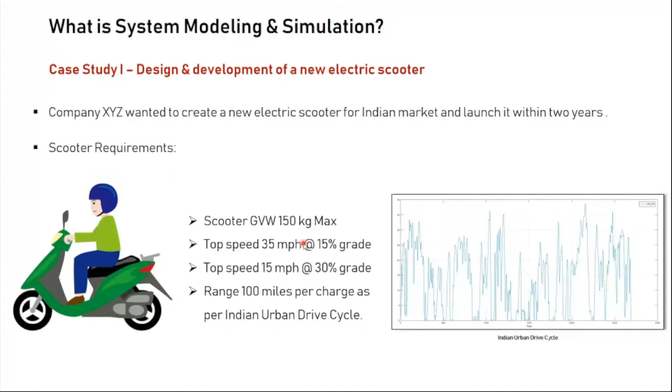You can go with 42 volts, 92 volts, or even higher voltage, but what is the voltage which you should go with? What should be the capacity of the battery? What should be the power? And what should be the configuration? In terms of lithium ion cells, you can have different numbers of cells in series and parallel. But what is the specific configuration, or how many cells you should keep in parallel, how many cells you should keep in series? That is the big question when you try to design an electric vehicle.

In the same way, the next question is: what motor should you be using? When you talk about motors used in electric vehicles, you have BLDC motors, permanent magnet motors, induction motors, switched reluctance motors — which one should you use? And what should be the motor power, efficiency, max current, max voltage? The next question: what should be the gearbox efficiency, and what should be the gear ratio? The gear ratio can vary from anything like 10 to 17 to 20, but which one should you go with? Different tire sizes are also available in the market.

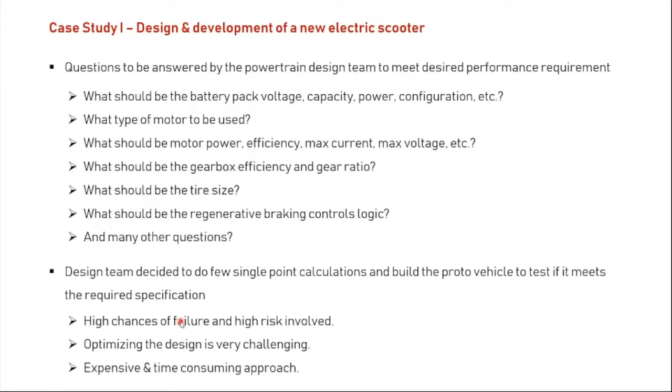So if they go with this idea, then definitely they are not going to meet the deadline of 2 years, because they have to have a product ready before 2 years. So they started thinking, what else can we do to get some confidence on the design before building it?

So realizing the risk involved in the conventional design approach, the team started thinking: is there a way to get confidence on proposed powertrain design concept without building it or without building the physical prototype? Or is there a way to test multiple powertrain design concepts without building the physical prototype? Or is there a way to reduce the number of real tests?

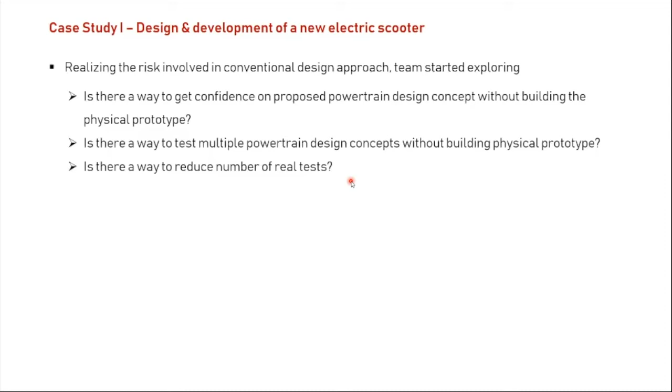So the team doesn't want to go with the conventional approach, but they wanted to get confidence on the design concept before building the prototype, and have a clear thought of what they are going to build and how it is going to perform. So how to do that? And the answer they got is system modeling and simulation.

So the team decided to build a virtual model of the electric powertrain and perform a simulation to predict its range. So now they decided they are not going to build the real physical electric vehicle, but they want to virtually model all its components one by one.

So they build the mathematical model of the powertrain components, that includes the motor, battery pack, and the gears, the tires, complete vehicle, and they integrated it to build the powertrain system model.

They did simulation runs with multiple concepts, because now you don't have to get a new motor. You just need to create a mathematical model or alter a few things in the model, and it will become a new motor. So likewise, you can test multiple concepts if you build the model of the powertrain.

Then, based upon the output, they decided which is the suitable powertrain component, and they built the physical prototype of that particular concept model, and then they ran the test and validated the results with the simulation. So here, whatever approach the team has taken, going with the virtual simulation, is the thing which the industry practices these days.

Nobody is going to build right away, start building with some single point calculation. They will first make a virtual prototype in the computer, test it, and then go for physical build.

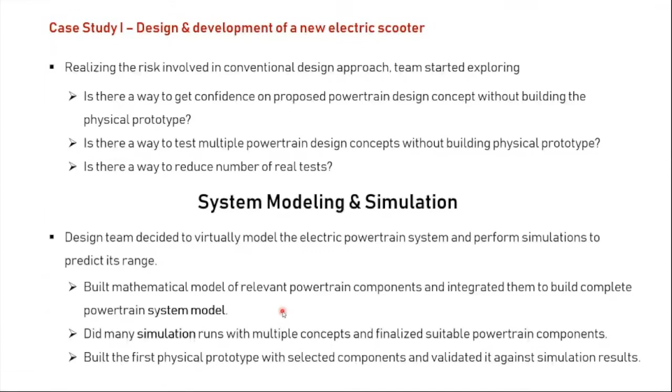So this is a small use case, but I want to show you some real examples. After this, once the use case is completed, I will read you the definition.

The definition of system modeling and simulation is the use of interdisciplinary functional, architectural, and behavioral models with physical, mathematical, and logical representation, performing model-based system engineering to specify, conceptualize, design, analyze, verify, and validate an organized set of components, subsystems, systems, and processes.

So now you know why I'm not a big fan of the definition. But here's the takeaway: you create an interdisciplinary functional model based upon the physics and mathematical behavior of that particular component.

Why I said interdisciplinary - when you talk about a vehicle, you have batteries, which is an electrochemical component. Electrochemistry goes into it, then electrical and electronics goes into it. When you talk about the motor, it's an electromechanical component. So it's not a single domain engineering product. You need knowledge of multidisciplinary engineering subjects to work on this. That's why it's called interdisciplinary function.

And the models are based upon physical and mathematical behavior of the system. It is not used only in one phase, but to specify, conceptualize, design, analyze, verify, and validate - in all stages of the project, it's used.

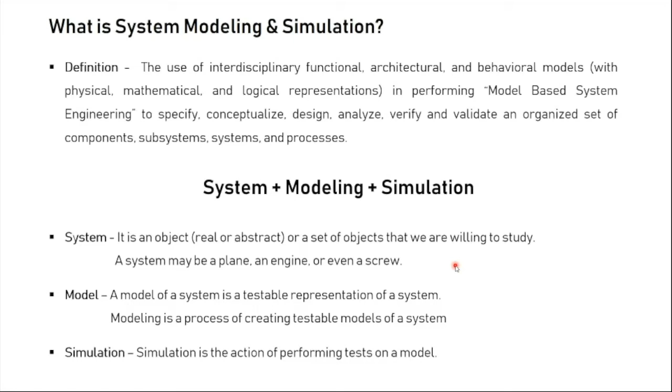So I hope you've got some idea about what system modeling and simulation is, and how it can be used in a project or while designing any product. Now, some real applications of system modeling and simulation from industry.

There are lots of examples - many examples - but in the interest of time, I have kept only two. The first is this Motobot, an autonomous robot capable of riding super bikes and competing on the racetrack.

If you're a MotoGP fan, you might know that Yamaha was working on this Motobot, an autonomous robot that can drive super bikes and compete on the racetrack. This was not done before - Yamaha engineers were the ones doing it for the first time.

So they wanted to check whether it is feasible or not. They hadn't started designing this in the initial stage of the project. What they did is create a mathematical model of the robot, did system simulation to see whether a robot is really capable of driving a vehicle or not. That is how they first validated their concept in a virtual environment and fine-tuned the system.

And when they got enough confidence that yes, this is possible, they started designing the real body of the robot, the real hardware, and started working on it. This is the way industry approaches creating a new product, or even optimizing one - if system simulation wasn't done before, they are doing it now.

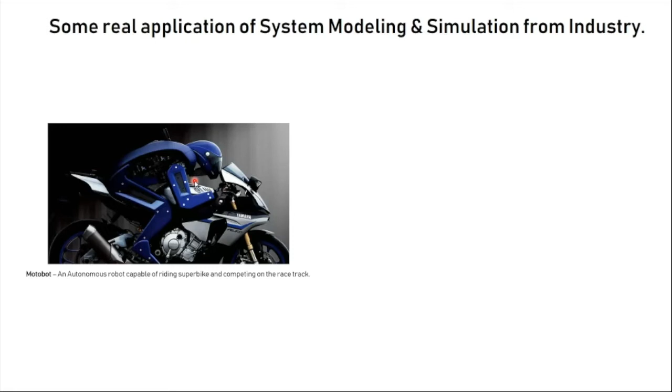The second example is also from the automotive industry, and I hope everyone knows what it is - the Ather 450X. Engineers of the Ather 450X highly used modeling and simulation tools, basically MATLAB and Simulink, to model the vehicle, to optimize the motor, the regenerative control logics, and the batteries. They extensively used modeling and simulation to come up with a product like this. These are two examples, but there are countless examples if you look outside.

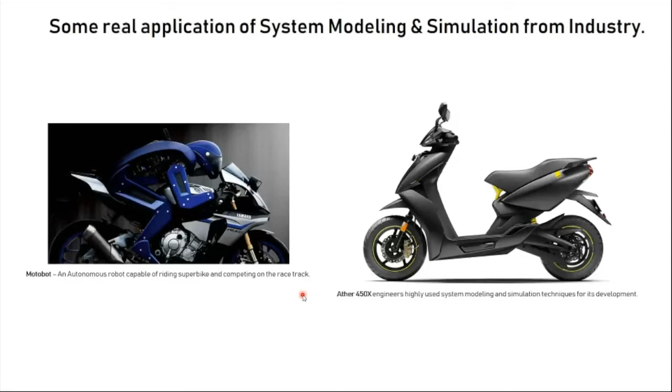So after that, let's move into some of the history of system modeling and simulation. System modeling and simulation didn't exist before 1940, and the reason for that is you need some kind of tool or aid to do that much computation, that much simulation.

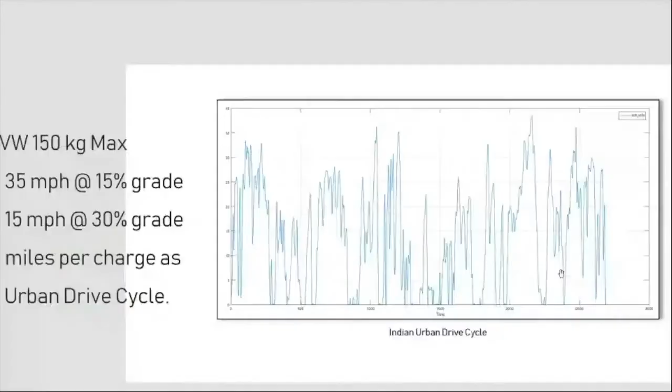So what happens when I spoke about this drive cycle, I'll quickly show you. When I showed you this drive cycle, you need to perform computation based upon your time step. Let's say your time step is 1 second. So total around 2,700 times you need to compute the vehicle velocity, how much current is drawn from the batteries, and what is the voltage drop. You need to compute it about 2,600 or 2,700 times.

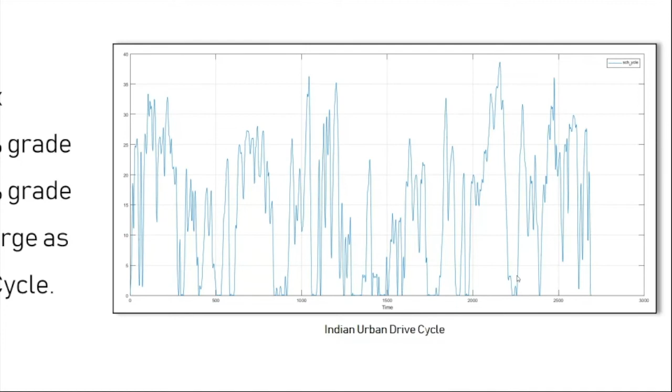And it is really challenging for any human to do that. You can do it, but it's very time consuming without the help of any computer. That's why system simulation was not very popular before the 1940s.

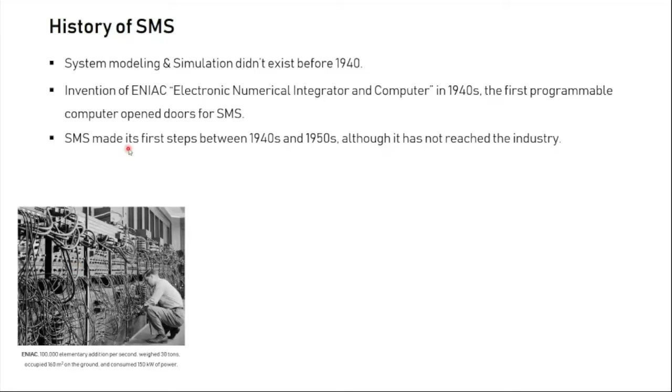But what happened is after 1940, we got our first Electronic Numerical Integrator and Computer, called ENIAC. That is the first programmable computer which came into existence in the 1940s, and that's what opened the doors for system modeling and simulation. SMS made its first steps between the 1940s and 1950s, although between the 1940s and 1950s, people started working on it, though it hadn't reached the industry.

Now, when you talk about SMS, there is still a huge gap within the industry, as well as between industry and academia, where most people in academics, in graduate and undergraduate programs, don't know about system modeling and simulation. Though in PhDs, most PhD students use this, undergraduate and graduate students don't have much exposure to it. This is the condition in India, but in foreign universities, there are some courses which offer this to graduate students, and that's how they get to know about it.

And when we talk in terms of industry, this is something like a secret weapon which the industry wants to keep within themselves, so that others won't know about it, and they can make products faster and quicker compared to their competitors. So there is a communication gap, and that is the reason most people don't know about it. I tried to learn it on my own.

And the most challenging part was to have a structured approach toward learning it. If you want to develop capability in any area, let's say mechanical engineering, there's a very structured way of defining it, where you need to start, what you need to know first, and then you can start learning about it. But when it comes to system modeling and simulation, there is no structured approach because of this huge communication gap between industry and academia.

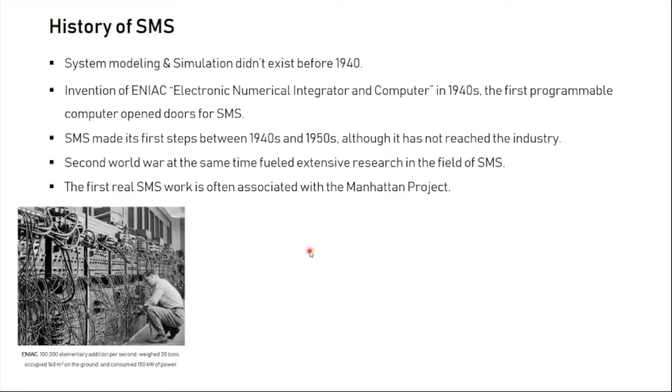And the first real system modeling and simulation work was used in the Manhattan Project. Most of you might know what the Manhattan Project is, and if you don't, it was about the development of the first atomic bomb, which was dropped on Hiroshima and Nagasaki by the US. That is what the secret project name was, the Manhattan Project.

And this is the person, John von Neumann, who was one of the pioneers in SMS in the 20th century. He and his co-workers worked on the first computer and modeled and simulated the nuclear detonation process, which ultimately led to the invention of the atomic bomb. He was a great scientist and mathematician of his time, and this was not his only contribution — there were many simulations he did without which the atomic bomb could not have been created.

And the algorithm which he has used is the Monte Carlo method for simulating the nuclear detonation process. So this is the history of it, and it is always good to know about the history of the things you're learning. So a bit of that.

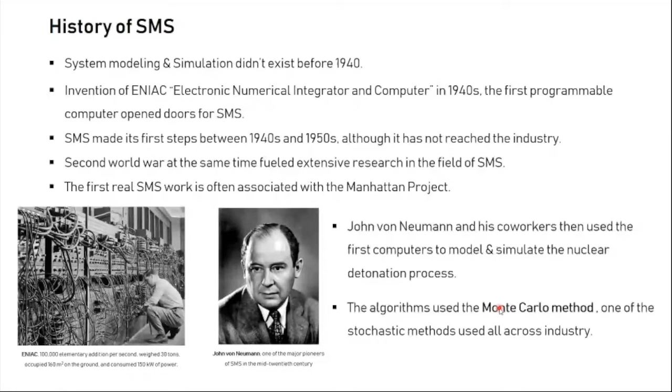Next, let's talk about some of the benefits of system modeling and simulation. The benefits can be categorized into two groups: the direct benefits, which are intrinsic benefits, and the financial benefit or the indirect benefit.

So what are the direct benefits? Testing cheaper and with more possibilities. Essentially, you are creating a mathematical model of a system, so you can create n number of variations of that system by changing the parameters. You don't really have to bother about the actual hardware, so you can test more possibilities. Since changing a parameter of a system is not a big deal, you are not ordering hardware or buying it, you're just changing the system parameter in the computer. The testing is much cheaper, and that is one of the biggest benefits.

Another benefit is accumulate and improve knowledge. When you model a system, you can learn so much about it by simulating its behavior. For example, let's say you model a battery thermal management system. You cannot monitor temperature at each and every point, you cannot put sensors everywhere, but in a computer virtual environment, you can put sensors everywhere and collect so much data which you cannot obtain from the real physical test system.

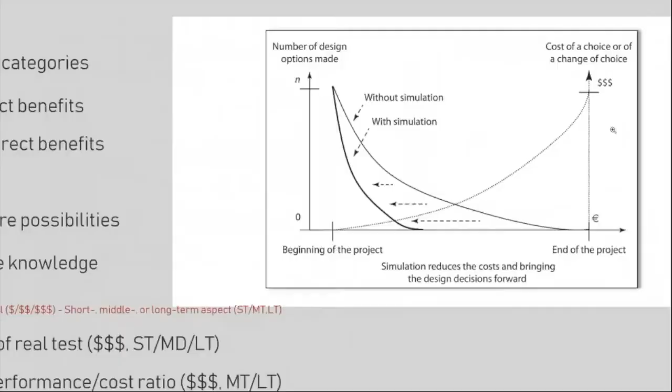And the fourth benefit is it decreases the cost of the design team. Yes, because we'll see how it helps in decreasing the cost of the design team. When you look at this graph, at the beginning of any project you have so many options to do - many decisions need to be made, like this motor, this battery, that battery.

Now, if you have simulation capability with you, you can run a simulation, and at the very beginning of the project you can decide which motor or which battery you want to go with, whatever you're working on. So you can make decisions very quickly and come up with a finalized design very quickly. But if you don't have simulation capability, you still have so many decisions to be made - you're not sure which battery, which motor, or whatever hardware - and your time doesn't stop, but still you need to make so many decisions.

And that's how the project goes, where till the end so many things are open. On the y-axis on the right side, during the phase of the project, from beginning to end, if decisions are made late in the project, it is going to cost you so much. So the later you make any decision in a project, the more cost it is going to incur.

That's why when we do any project, we try to have a crystallized understanding of what we are going to do, what components, what product we are going to use. With simulation, it is going to help you reduce your cost. But without simulation, chances are your cost will be high.

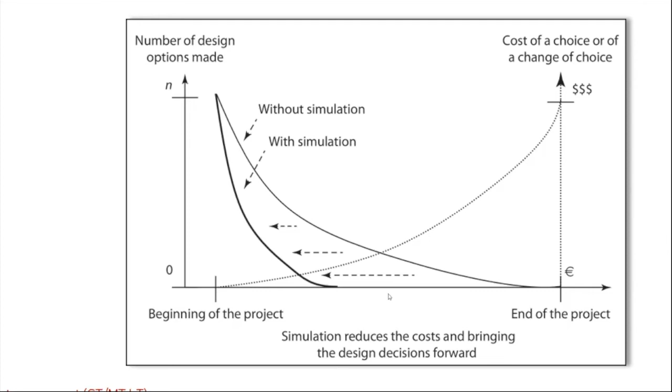Some of the audience who attended Dr. Ali Abbas's presentation on day one, I remember he mentioned testing a single hydro turbine costs like 50 lakhs rupees, if I'm not correct. So 50 lakhs rupees for a single turbine is too much, and that too you don't know whether it is going to work or not. That is why they resort to system modeling and simulation of the turbine using different blade profiles in the CFD analysis. That is one example I can quote, and likewise there are so many examples where you can save a good amount of money if you do system modeling and simulation.

Another benefit is making components more robust. Another point is decreasing time to market - you can decrease time to market because now you know what you need. You can engage the supplier at the earliest, request for the new part as soon as possible and get the items done, test it earlier, validate it earlier, and launch it quite earlier than anyone else. So these were the benefits.

And now we'll talk about types of system modeling. When we talk about system modeling, there are different types of systems available, but we will be discussing only two: the physics-based model and the data-based model.

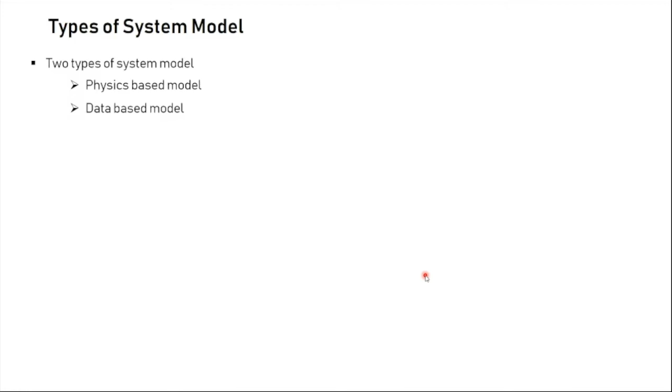So what is a physics-based model? It is a multi-physics model based upon several laws and theories of physics. It's multi-physics because if you see any component or product, let's say a motor, you cannot apply a single physics law or theory into it because it involves electricity, magnetism, and mechanical laws. So there are so many things which go into it, that's why we call it multi-physics. If you see most dynamic systems, it's never a single law of physics that can work - it has to be from multiple domains of physics.

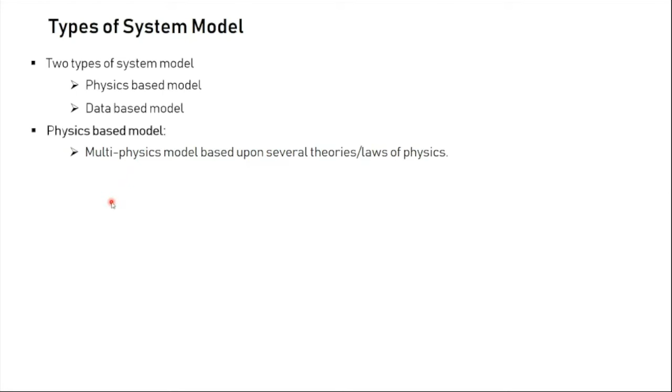And that's what the physics-based model looks like, where you use the laws and theories of physics to create it. And what is a data-based model? Data-based models are models created based upon the data captured from the system using different tests.

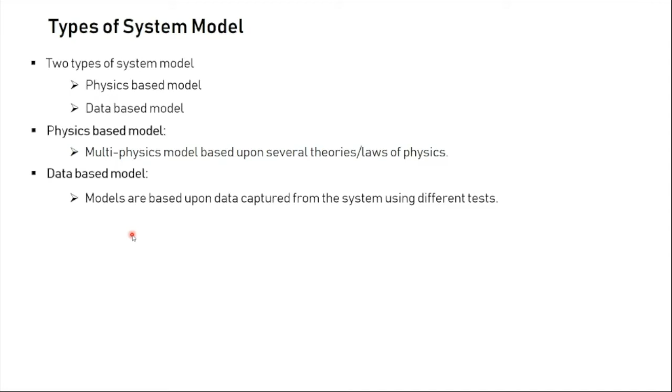So don't worry if you're not able to understand it, I'm going to explain it with the help of an example. If you want to create a data-based model of any system, you subject that system to multiple numbers of tests. You gather the test information, and based on that test, you can create a model of that particular system. Let's try to understand with the help of an example.

Let's say you want to create a permanent magnet synchronous motor model for powertrain performance simulation. So what are the inputs required for a physics-based model? You would need the d-axis current, q-axis current, stator phase resistance, d-axis inductance, q-axis inductance, permanent magnet flux linkage, shaft moment of inertia, Coulomb torque, viscous friction coefficient. These are the internal parameters of the particular PMSM motor. In order to create a physics-based model, you need to have all these input values for the system.

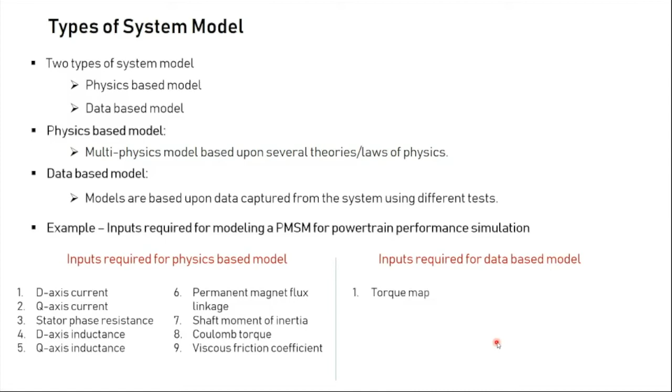You can see here, you have the electricity, you have the resistance, you have the magnetic field, you have the moment of inertia, Coulomb torque. And if you want to create a data-based model, then you need to test this permanent magnet synchronous motor to get a torque map and the efficiency map. Torque map is nothing but a graph or plot between the torque you are getting at different RPM, and the efficiency map is a map of torque versus RPM and what efficiency you are getting at a particular torque and RPM.

So with these two inputs, you can create a data-based model of a permanent magnet synchronous motor.

Now, if you're working on a project where you need to model a motor, usually you will go with a data-based model. The reason is if you're not designing a motor and buying it from outside, the manufacturer is not going to provide you all these internal details because these are related to the design of the motor. They cannot share that because it's kind of an internal secret they want to keep to themselves, and they don't want to reveal it because if they do, the competitors may also know and create a similar product. So they don't want to reveal it, and you cannot easily find these values, or else you have to tear down the motor and check everything to get the values. So if you're not manufacturing or designing a motor, and you're just using a motor from a supplier, then you will go with the data-based model approach.

And this is what most industries follow, electric vehicle industries follow, because they don't develop motors, they order motors. Sometimes you work closely with the supplier, and that time you can get access to this information, but most of the time it's the data-based model which we'll be working on.

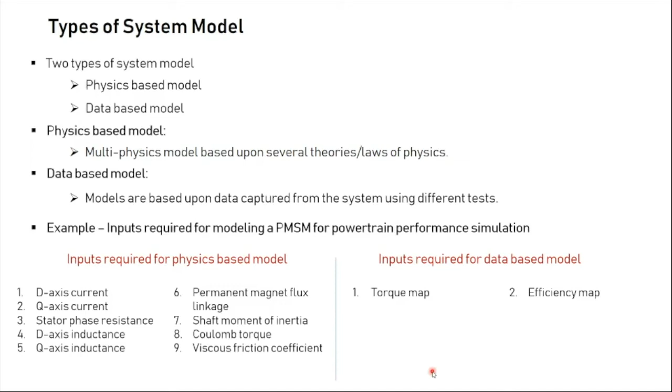So that's how you have to choose which type of system model you have to create, based upon the type of work which you are doing. So let's see what are the generic steps involved in system modeling and simulation.

So when you start creating a model of a system, the first step is to derive the governing mathematical equation. I will tell you the steps and then we will see one example, and hopefully after that example, you will understand how a system model is created for any particular system. So first you need to derive the governing mathematical equation, maybe using Newton's laws or Kirchhoff's laws or other laws of physics to create the governing equation, which will be mostly in the form of differential equations.

But those differential equations cannot be solved directly in computers. My statement is partially correct because nowadays MATLAB and Simulink can also solve differential equations if you create them there. But generally speaking, these governing equations, which are differential equations, are not so computer friendly. And therefore, after deriving the governing equations of the system, you need to convert them into a form so that you can use numerical methods to solve them.

So just bear with me, I will explain with the help of an example. So here the takeaway is you need to convert the mathematical equation into numerical equations so that you can use numerical methods to solve them.

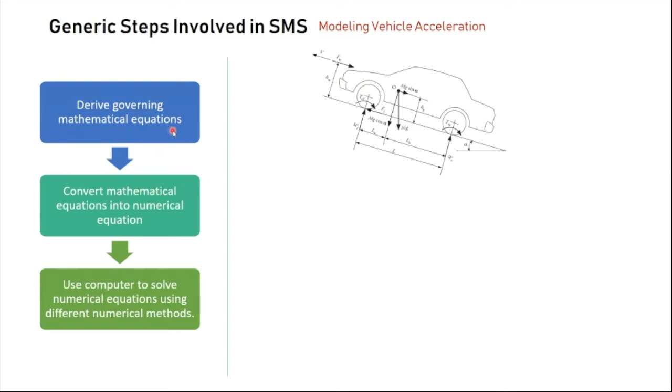So this is the slope, and the car is trying to go up the hill. So you made a free body diagram and try to find out the governing mathematical equation of this particular condition. You make a free body diagram and use force balance equation, and Ft is the traction force which the car is going to apply against all this resistance load.

So this is a differential equation, and now you can solve this differential equation. This is the system equation, which is telling you the behavior of the system, and the behavior we are particularly interested in is the acceleration behavior.

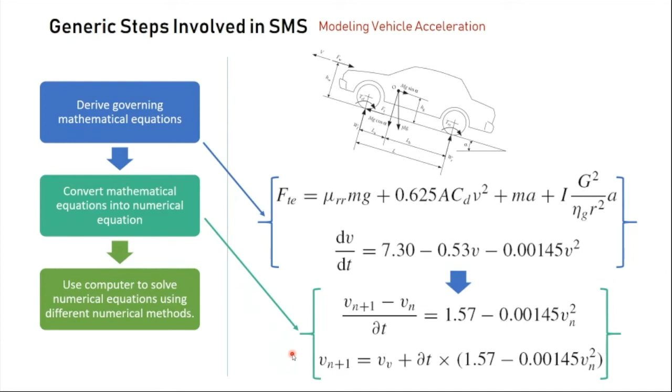Before jumping on, I just wanted to tell you that I have used Excel VBA, MATLAB and Simulink for doing this. And trust me, you don't have to really know MATLAB Simulink for doing any simulation. You can do it just with some knowledge of Excel. So if you don't know about system modeling and simulation in MATLAB Simulink but want to do something, get started with Excel. Trust me, you will be amazed to know the capabilities of Excel and what it can do. That is one recommendation I have.

Now moving on. I have talked so much about system modeling and simulation from the electric vehicle perspective, but this FDP's theme is thermal engineering. So I wanted to give a touch of thermal engineering as well. The second case study which I have taken is the electric vehicle battery thermal management system.

I heard one noise, just wanted to check if my call is dropped. Can anyone confirm that I'm still there? Yes sir, yes, you are here. Okay cool, I heard some noise and thought maybe my call had dropped, so just wanted to check. Cool.

So from the thermal engineering perspective, system modeling and simulation has applications in various domains, and I'm working in electric vehicles, so this is what I'm familiar with. Trust me, system modeling and simulation from a thermal aspect is an emerging field in this area, because at the end of this case study you will be able to appreciate how important thermal management system is in any electric vehicle, and it's an emerging field. So let's start with it.

So the second case study is about battery thermal management system optimization. What is battery thermal management system? Basically it's an algorithm in the battery control, in the BMS, battery management system, which maintains the vehicle lithium ion battery pack within the desired operating temperature range by regulating the cooling heating system in the vehicle.

The reason for that is the lithium ion battery has a thermal runaway, and it has a certain limit of operating temperature. If it is not operated within that temperature, the battery might catch fire, and you won't get efficient operation of the battery if the battery temperature goes up, because the resistance of the battery increases.

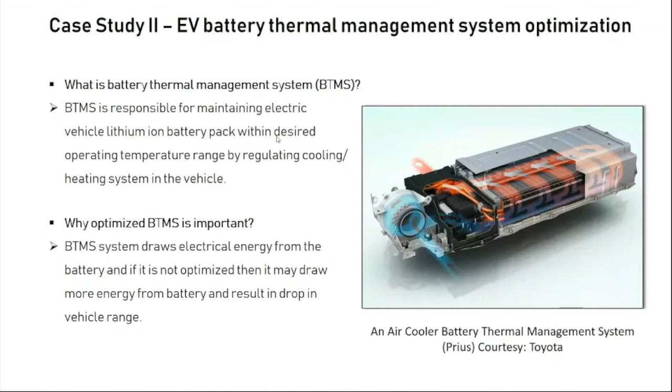Before going into more detail, let's see what a generic battery cooling circuit looks like. Here you can see this is the battery of any electric vehicle. So this is the lithium ion battery, and we have so many temperature sensors inside the battery to monitor the battery temperature.

Usually the operating range of a battery is from 25 degrees Celsius to 45 degrees Celsius, and we want our battery operating within these limits. If it goes beyond these limits, the chances are it may catch fire because of thermal runaway. That's why we are putting a refrigeration circuit, so that we can cool the battery when the temperature goes above a certain point.

One point to consider is that in an electric vehicle, when you draw current from a battery, its temperature increases, and as the temperature increases, the resistance values also change. So the performance of the battery deteriorates at higher temperature, and you don't want to run your battery at higher temperature. That's the reason you need a refrigeration circuit.

It has a compressor in it, and when the system detects that the temperature has gone beyond a certain range, the pump and the compressor turn on, and circulate a coolant through the battery so it can cool the battery and bring it down to a certain limit.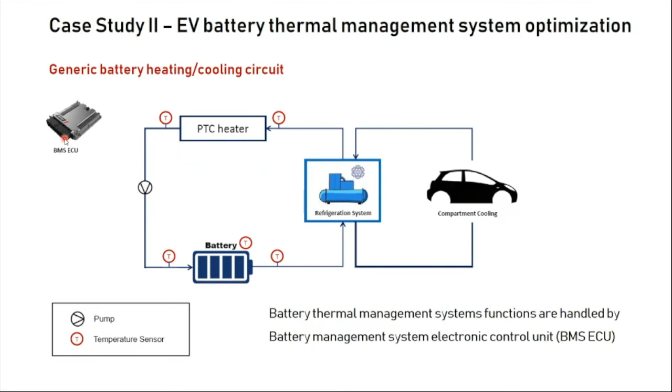We want to solve it with the help of system modeling and simulation. So we start with modeling the cell. In an electric vehicle there are hundreds of cells, or even 200, 300, any number of cells based upon the range and performance of the vehicle. This thing which looks like a power bank is a single cell, and it is interacting with the ambient in all 5 directions you can see here.

So the heat interaction is within all these 5 directions. Basically, the way battery packs are designed is the battery is kept on a plate called the TIM, thermal interface material, and this TIM is kept on the cooling plate cross section. What the TIM does is make sure that whatever heat is generated in the battery during operation is taken out to the TIM and then conducts to the cooling plate where the coolant is circulating. The blue line shows the coolant going in, which is lower in temperature, and the coolant out, which is higher in temperature, assuming the battery is already heated.

So this is how a real physical battery or cell in an EV looks like. Now you want to model it so you can perform tests virtually on these batteries to find out how much heat is generated, how much coolant flow is required, and what the temperature of the coolant should be. All these things you want to design or decide without creating this physical thing. So what you do is create a model in Simulink.

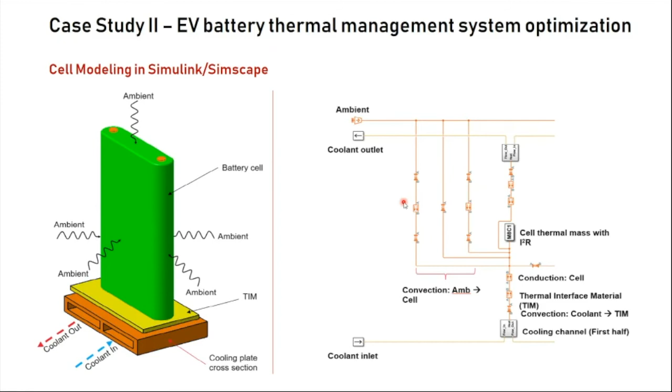Now this is the model of the cell, but in an electric vehicle there will be n number of cells. So how do you model that? You model the cell first, then those cells are kept inside. If you break down a battery pack, it will have n number of modules inside it, and each module will have n number of cells inside it.

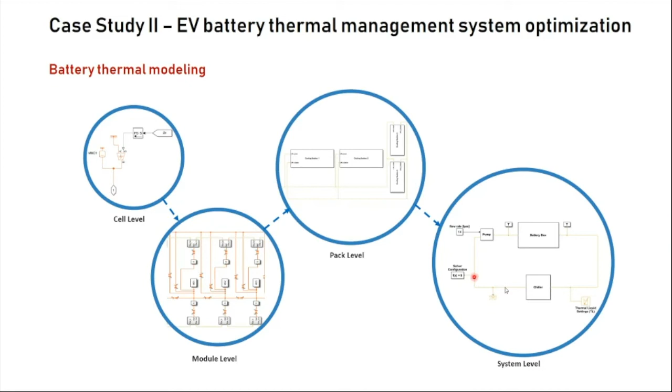So when modeling a battery pack on a system level, you start with a cell, then arrange those cells in a particular series and parallel format to get a module, then arrange those modules in a different configuration to get a pack level, and that pack level is connected with the refrigeration unit where you have the pump, compressor, coolant, and PTC heater. That's how we model from cell level to module level to pack level and the system level, and that's how the cooling system is modeled.

When modeling the refrigeration cycle, you have to consider its basic components: the condenser, evaporator, compressor, and expansion valve. One advantage while modeling this in Simulink is that you have a default model of the refrigeration cycle already available in Simscape, and you just need to tweak some parameters so it represents the system you are willing to simulate. It's already inbuilt, you don't need to create it, just use it in the simulation.

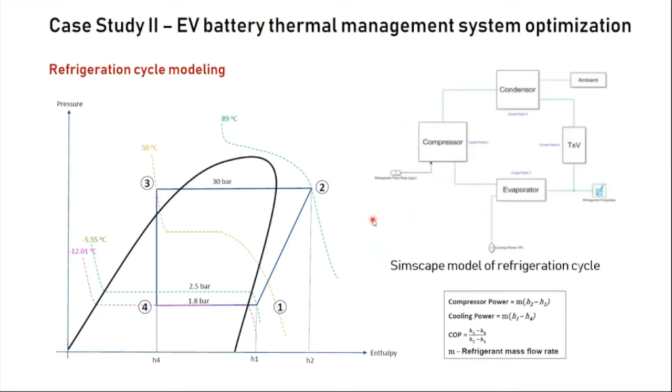And since it's a complete vehicle level simulation, you need to model the vehicle as well. Here the vehicle is modeled using a Simulink vehicle block, where you take inputs like wheel radius, GVW, grade, and speed. This vehicle model, considering all these things, helps create the instantaneous power demand, and that much power is drained from the battery, and you see how much heat is generated when the battery delivers that power.

Here it's considering the MIDC cycles, MIDC part 1 - these are the different cycles. The forces considered are rolling resistance, gradient resistance, inertial resistance, and aerodynamic resistance, and the motor shaft torque depends on the vehicle torque, gear ratios, and transmission efficiency. So if you are trying to simulate the battery of a vehicle, you need to create the model of the vehicle as well.

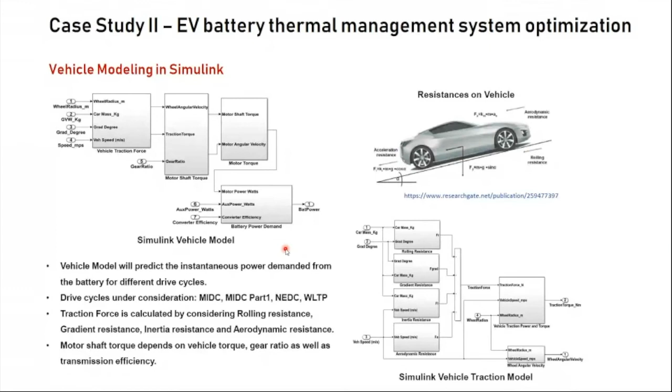So a simple model you have created and integrated everything to create a complete system level model of the electric vehicle and the battery cooling circuit. So how is the battery modeled?

Now there are different models of batteries available, but if you want to simulate the heating effect, you need to go with a 2RC model. So this is how the 2RC model of the battery looks like.

The intention is not to make you understand exactly what these things are, but to give you an insight that this is the way it is being modeled, where you represent a battery in a 2RC circuit format. Your main intention is to find out the terminal voltage VT, and these different parameters you are seeing, you can get from the electrochemical details of the cell. You put it in and you are able to simulate a real cell in your computer. So that's how the battery is modeled.

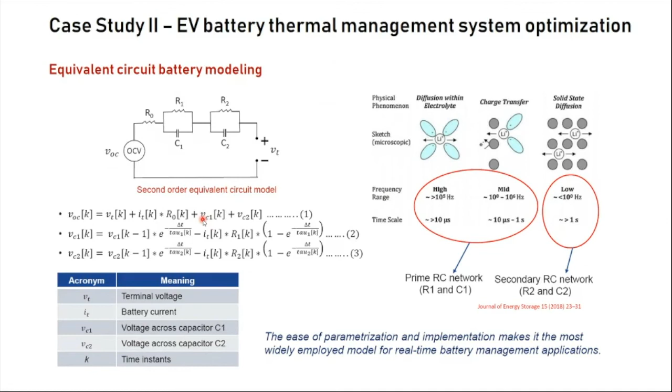After modeling all these things, all the models are integrated, and then you run a simulation to see how the coolant temperature or the battery temperature is varying. Now I'm going to show you the results.

In this slide, I'm showing you the simulated versus the real test result. The dotted line or the blue line over here is the temperature. In this plot, I'm going to show you the bottom temperature and the top temperature of the cell. On the y-axis we have the normalized temperature, and on the x-axis we have the normalized time.

You can see the module bottom temperature and the real temperature - the blue one is the simulated result, and the dotted one is the test result. So you can see how closely they are matching.

We are able to match our results quite closely when we talk about the bottom temperature of the cell. But there are certain deviations on top of the cell, because maybe we don't have a proper conducting plate over there, or there are some estimation errors included. So that's how we are getting some deviation on the top side.

But this is not too much deviation, and this much deviation is acceptable and enables you to help in making business decisions, or to select what type of components you need, what should be the flow rate of the pump, and what algorithm you should be using.

So this is the real advantage, where you can see that without having the real physical cell and the cooling system, you are able to create a system which is behaving the same way as the real system behaves.

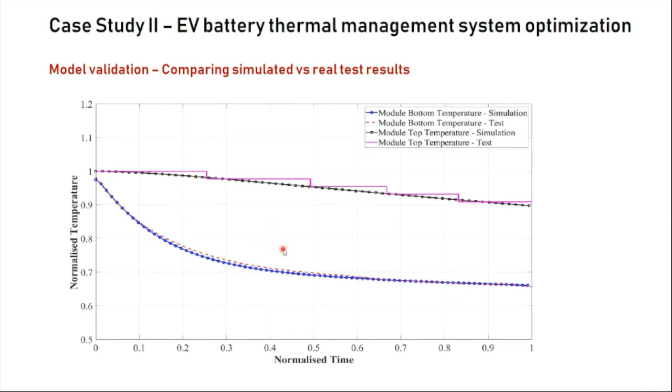And let's see the logic development.

So the older logic was that the compressor will cut off based upon the battery temperature. When the battery temperature reaches a particular value, then only the compressor will start. And if the battery temperature comes down, it will cut off.

But the new logic, which after this test we have proposed, is that the temperature of the battery is also considered, but the coolant temperature is also considered. So if the battery temperature goes above a certain limit, the compressor will not turn on - it will wait for the coolant to go up by 3 degrees Celsius more, then only the compressor will start.

So this is the new logic which was tested against the old logic. And these are the different parameters which were set, like the ambient temperature, battery initial temperature, coolant initial temperature, and different charging rates were considered to see that if we change the logic from old to new, what changes we are going to see.

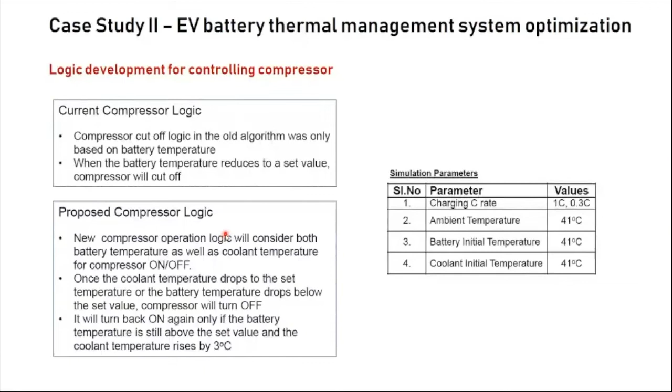And the results I'm going to show you in the next slide. Time check, okay. So here we can see the old - we are considering two different charging rates, one is 0.3C charging rate, and the other is 1C charging rate.

In the old algorithm, the battery final temperature was 34.2 degrees Celsius at the end of the test. As per the new algorithm, the battery final temperature is 35.76 degrees Celsius. Now if you see, as per the new algorithm, the battery temperature has gone up, but it is still within the operating range of the battery. And when you see the energy consumed by the compressor, in the first case it was like 1.321 kilowatt hour.

And in the second case, it had reduced to 0.832 kilowatt hour. So by the new logic, you can reduce the energy consumed by the compressor. And this amount of energy which you're able to save can be used by the electric vehicle to cover some more distance. So that is the main intention.

When you do the testing with 1C charging rate, the battery final temperature was 43.71, and with the new algorithm it was 44.21. Though it has increased, it is still in the operating band, and in this case you are able to reduce the energy consumed by the compressor by 50%. That much energy saved can be used to drive the vehicle a few more miles.

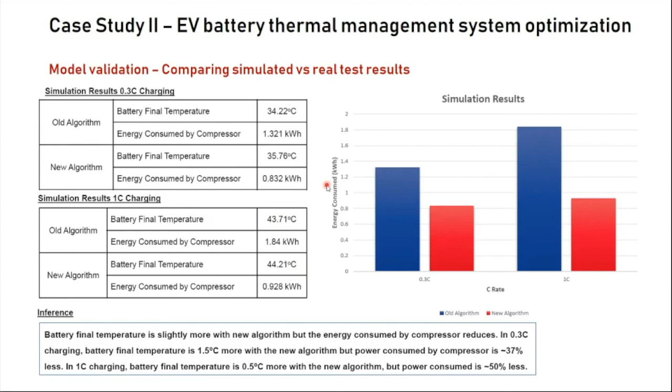While selecting the component, you will be so much confident by doing a 1D simulation where you will know that going with this design or this particular component is definitely going to give good performance. It helps in component selection, and that's why you reduce so much money which you invest while making the design and the prototype, because whatever you're going with, you've already tested it and have much confidence in that.

And it can be used in logic development, so you can test various logics and algorithms in a virtual environment, without which if you try to test it in a real physical prototype vehicle, it is going to take so much time and effort, and it's time consuming.

Controller testing: the beauty of making system models in Simulink is that those models can be directly converted into embedded C codes, and those C codes can be flashed into the controllers, and you can test those controllers in a virtual environment which is called HIL. In HIL testing, you can figure out whether it is working well or not.

Otherwise, you need to write codes in embedded C, and there can be thousands of lines which can be easily done or converted with the help of Simulink. So this helps in HIL testing as well, if you do it with the